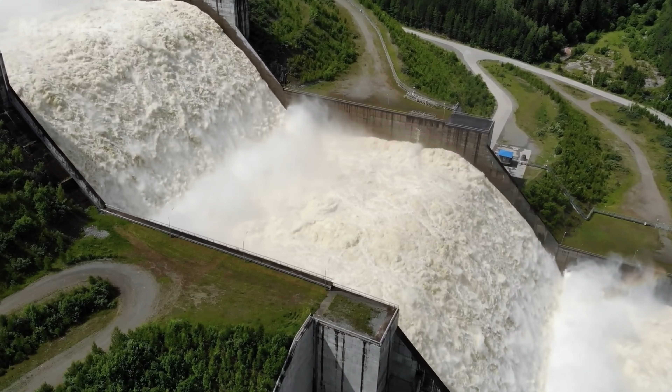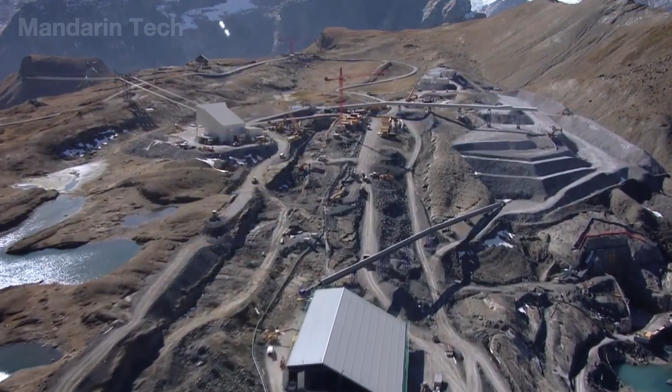Standing across the Yenisei River, Sayano-Shushenskaya is a mega dam that has become an energy symbol of Siberia. When completed, the plant reached a capacity of up to 6,400 megawatts, making it the largest hydroelectric power plant in Russia. To build this project, the Soviet Union had to spend decades constructing it amid snow, ice, rocky mountains, and a massive river that was never easy to conquer.

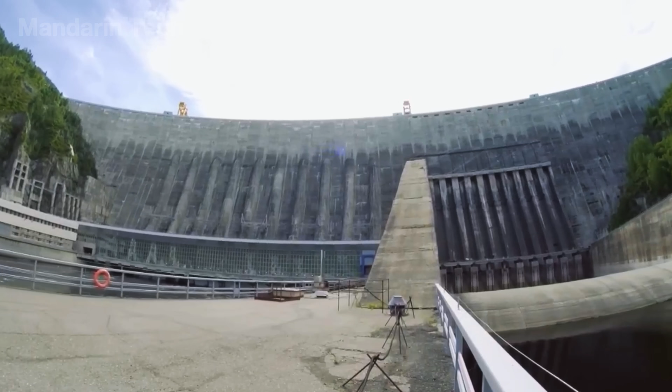But what made Sayano-Shushenskaya famous was not only its scale. Behind its 242-meter-high concrete wall is the story of one of the Soviet Union's most ambitious engineering projects, along with one of the most serious hydroelectric accidents of the 21st century, which forced the entire global hydropower industry to rethink its safety standards.

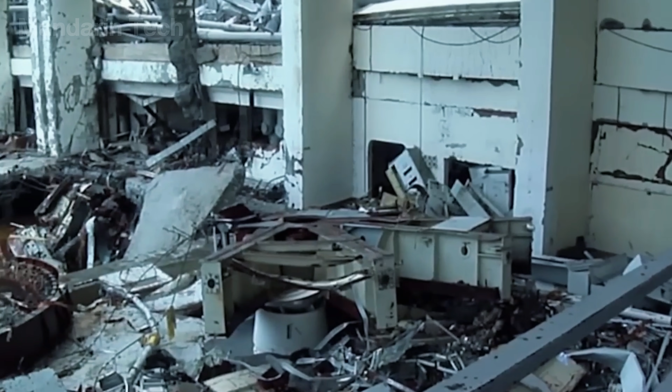Join Mandarin Tech as we explore the story behind this mega dam in the heart of Siberia.

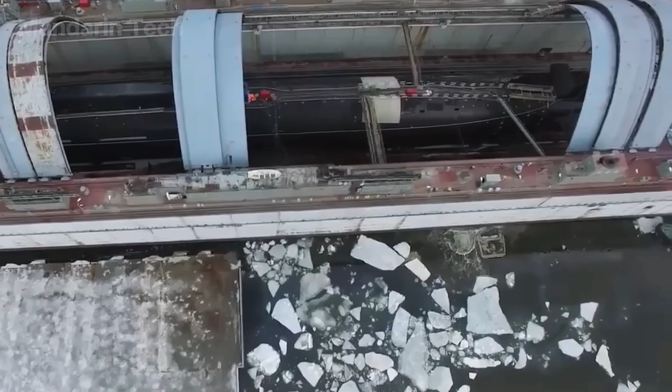At the height of the Cold War, the Soviet Union did not compete with the West only through missiles or nuclear submarines. That competition also took place inside metallurgical plants, mineral mines, and massive industrial complexes stretching across Siberia, where electricity consumption was so enormous that only mega hydropower projects could meet the demand.

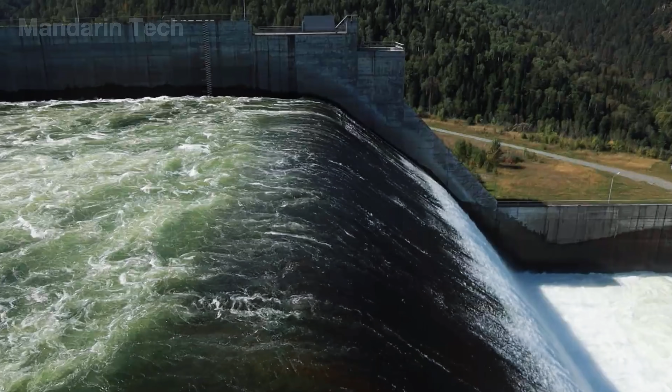For Soviet planners, the Yenisei River was seen as an almost endless source of energy, flowing wastefully into the Arctic Ocean every day. If they could harness the power of this river, the Soviet Union would have access to cheap electricity, strong enough to operate strategic industrial zones for decades. It was from that ambition Sayano-Shushenskaya was born.

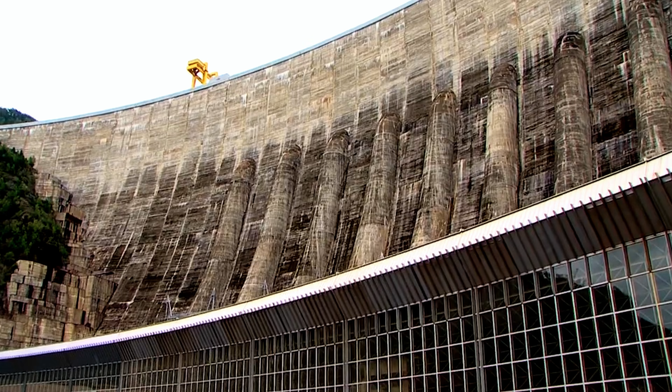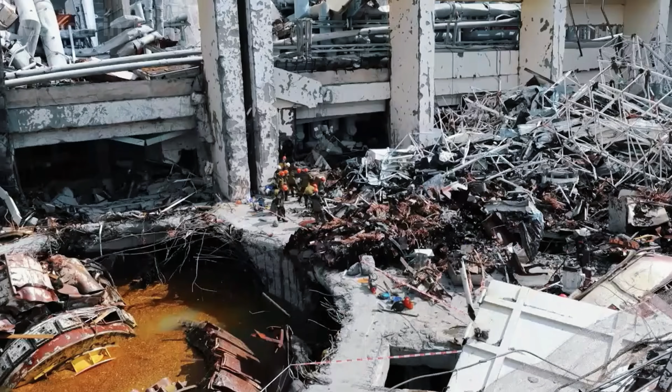For many years, this power plant served as the energy heart of Siberia, providing a massive supply of electricity for the entire region. However, after decades of operation, a horrifying incident occurred. In 2009, Unit 2 was suddenly destroyed after the bolts holding the turbine cover in place broke, taking the lives of 75 people and becoming one of the worst hydroelectric accidents of the 21st century. Yet even in the middle of that disaster, the dam body remained standing, preventing a scenario that could have been far worse.

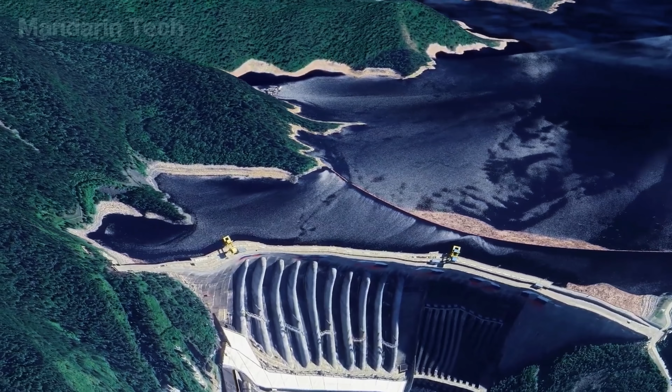The story began in 1963, when the Sayano-Shushenskaya project officially started construction. But before the dam could be built, Soviet engineers had to do something that seemed almost impossible: divert the Yenisei River away from the construction site. This was not an easy task.

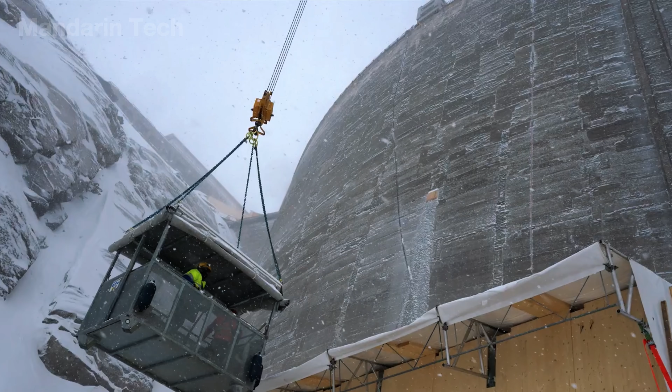The Yenisei is one of the largest rivers in the world, with an enormous volume of water flowing through the canyon every day. Meanwhile, the construction site was located in Siberia, where winter temperatures often drop below -30 degrees Celsius. The ground and rock remained frozen for many months. The annual construction window was significantly shortened, and operating heavy machinery became far more complicated than on ordinary construction sites.

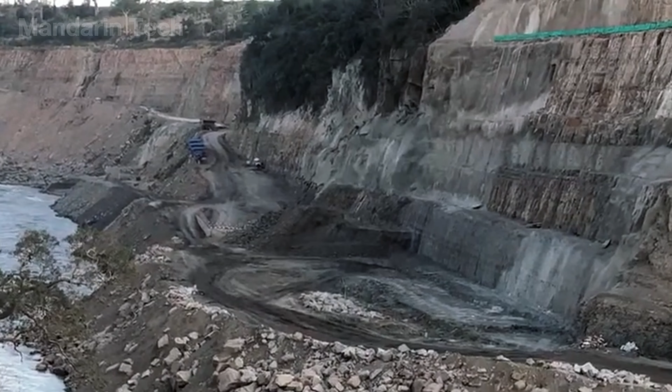To solve this problem, the engineers chose a river diversion method using a system of tunnels through the mountains. First, construction teams drilled and blasted the rock on both sides of the canyon to create diversion tunnels capable of carrying the full flow of the river throughout the dam's construction period.

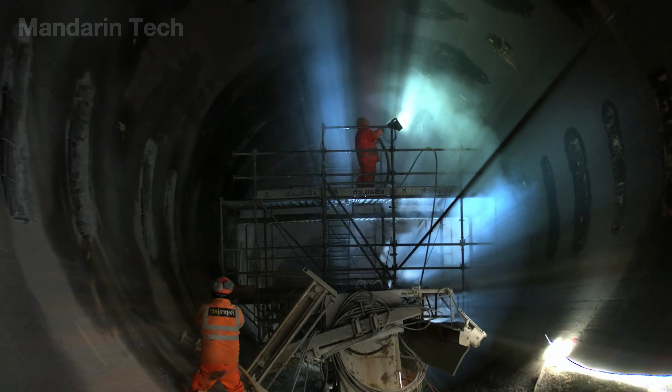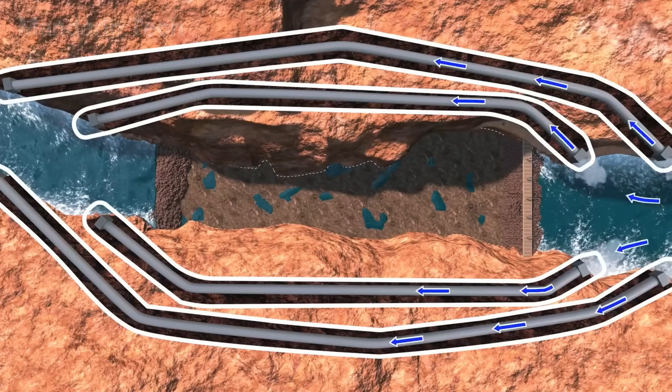After the tunnels were completed, the project moved into the stage of building upstream and downstream cofferdams. Millions of cubic meters of earth and rock were transported to the site and continuously dumped into the riverbed to gradually narrow the main flow. When the cofferdams reached their designed elevation, the river water began to be fully directed into the diversion tunnel system.

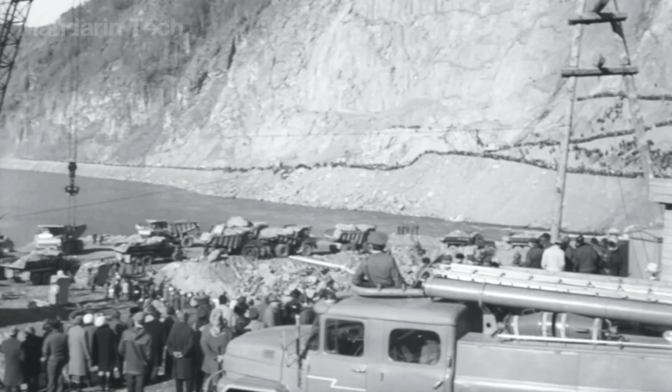The section of the riverbed inside the cofferdam area was then pumped dry, and the layers of silt, sediment, and accumulated alluvial material that had built up over thousands of years were removed. This was also the moment when the Yenisei River had been completely diverted.

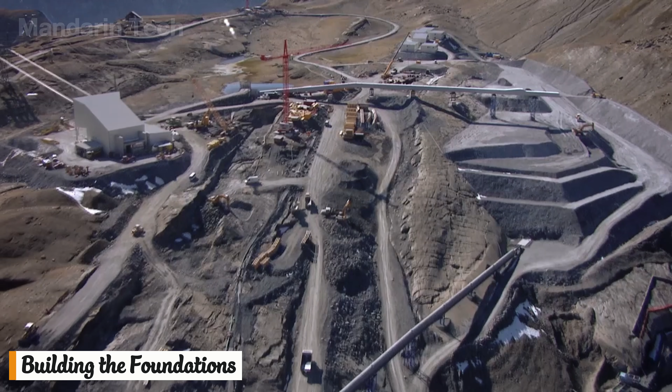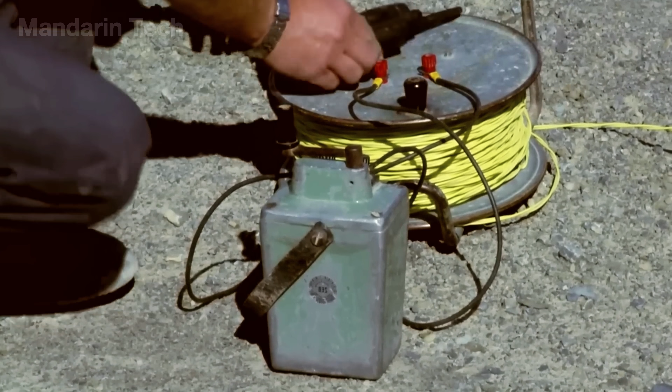After the river had been successfully diverted, the construction site had to carry out a large-scale foundation treatment campaign. Construction teams used drilling and blasting to remove the weathered rock layer and unstable soil and rock above the bedrock. More than 10 million cubic meters of material were excavated, exposing the stronger rock masses underneath.

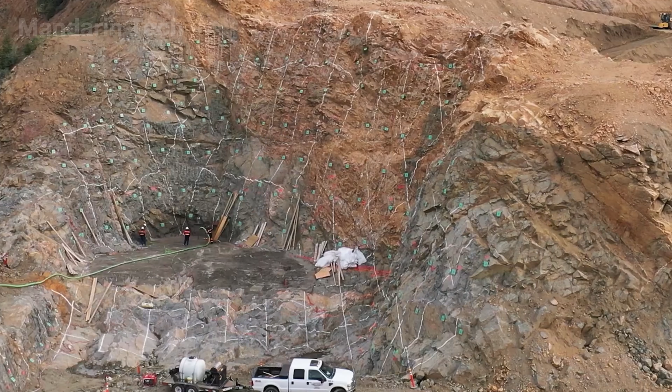After the foundation excavation was completed, the engineers began a detailed survey of the bedrock surface. Natural cracks were identified, cleaned, and treated using high-pressure grouting. Thousands of boreholes were drilled to pump cement grout deep into the rock foundation, helping reduce water seepage and increase the stability of the entire dam foundation area.

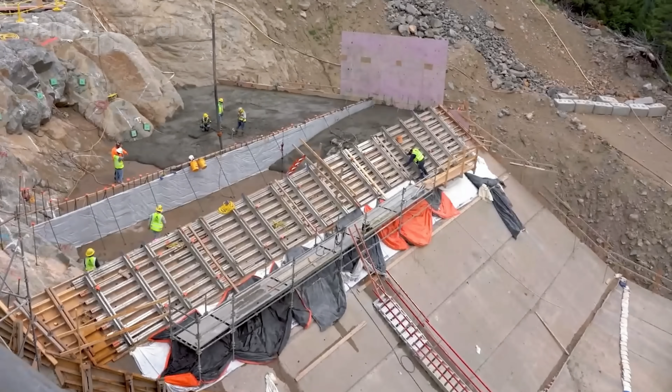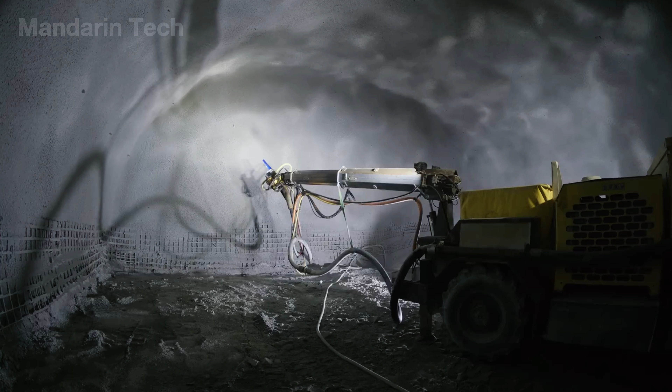At the same time as the foundation reinforcement process, inspection galleries and technical tunnels inside the bedrock were also constructed. These structures allowed engineers to access the foundation area during later operation, while also monitoring water seepage, deformation, and stress developing beneath the structure.

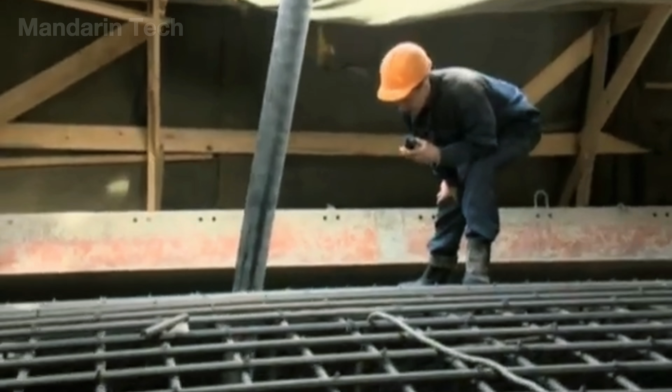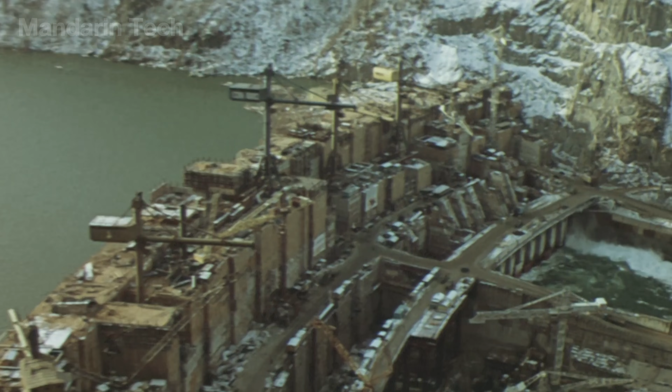Only after all foundation treatment work had been completed did the construction of the dam body truly begin. Sayano-Shushenskaya was designed as an arch-gravity dam, a massive structure that combines the weight of the dam body itself with the curved shape of the structure to transfer water pressure to the rocky mountain slopes on both sides.

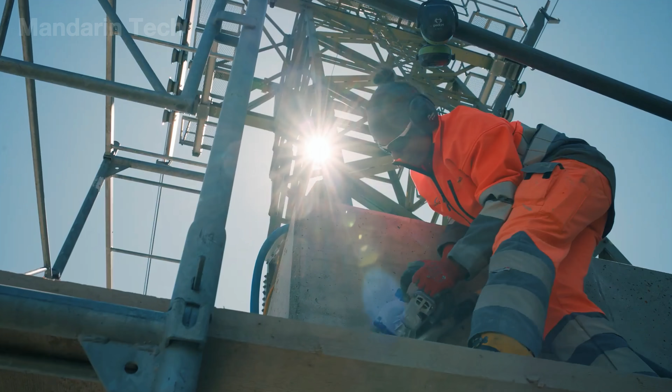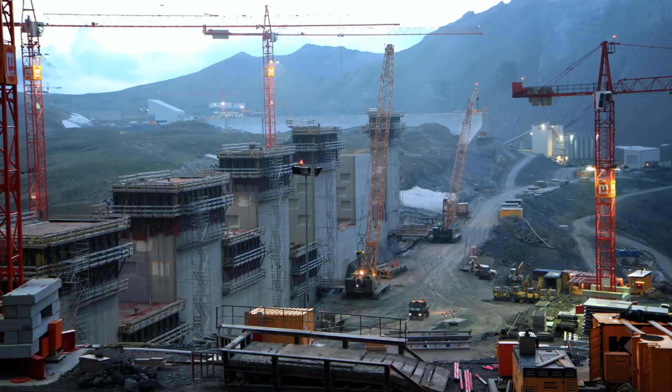To build this project, Soviet engineers did not construct the entire dam all at once. Instead, they divided the dam body into many separate blocks, then poured concrete layer by layer and stage by stage. However, the biggest challenge did not come only from the enormous volume of concrete, but also from the harsh climate conditions of Siberia. The summer was short, but temperatures could change sharply between day and night, while the winter lasted a long time with extreme cold.

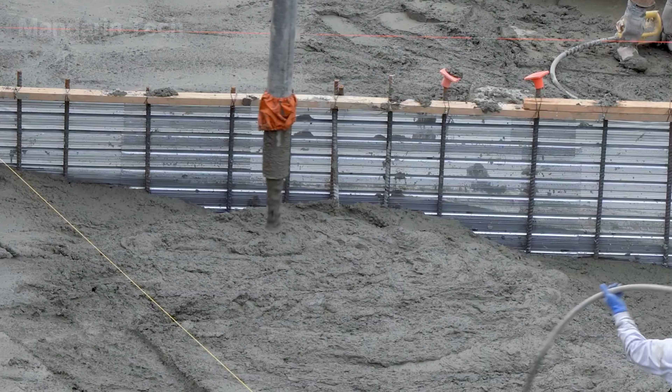At the same time, the hydration process of cement continuously generated heat inside the concrete mass. If the temperature was not tightly controlled, the difference between the core and the surface could create dangerous cracks. To solve this problem, the concrete temperature was continuously monitored by a system of sensors, while the concrete pouring schedule was carefully calculated to limit thermal stress.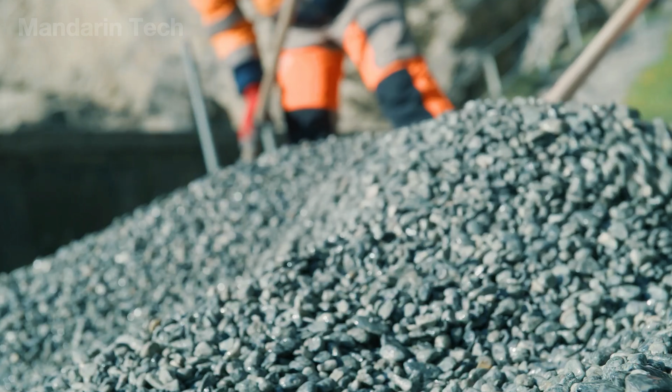At the same time, a large-scale material transportation network operated almost non-stop to supply concrete to the construction site. Layer by layer, the concrete gradually stacked up. 50 meters, 100 meters, 150 meters, and then even higher. In the middle of the western Sayan Canyon, a giant wall began to take shape.

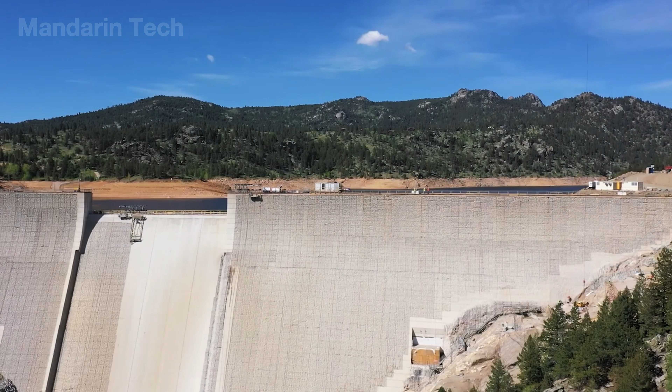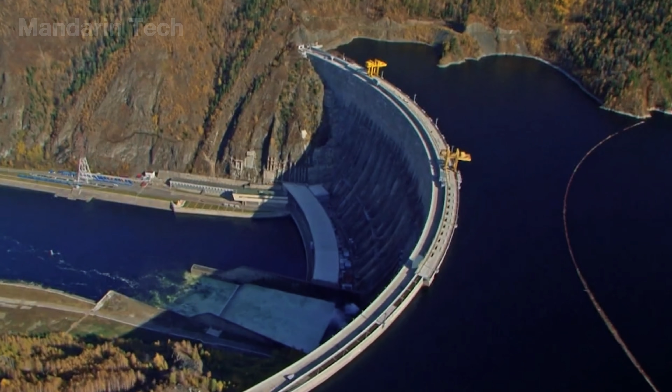The higher Sayano-Shushenskaya rose, the more it had to face another life-or-death challenge. Behind this dam is a reservoir with a capacity of more than 31 billion cubic meters of water. Under normal conditions, it is a massive source of energy that powers Siberia's industrial zones. But during flood season, that same body of water, weighing tens of billions of tons, can become a threat to the structure. If the flood discharge capacity is not sufficient, the water level behind the dam will continue to rise and create pressure beyond the design limits.

That is why Soviet engineers had to build one of the most important spillway systems of the entire project. The work began with large-scale drilling and blasting operations to create a construction platform in the middle of rugged, rocky mountain terrain. After that, concrete was poured continuously to form water channels, guide walls, and energy dissipation basins, structures whose purpose was to control and reduce the force of the water before it returned downstream.

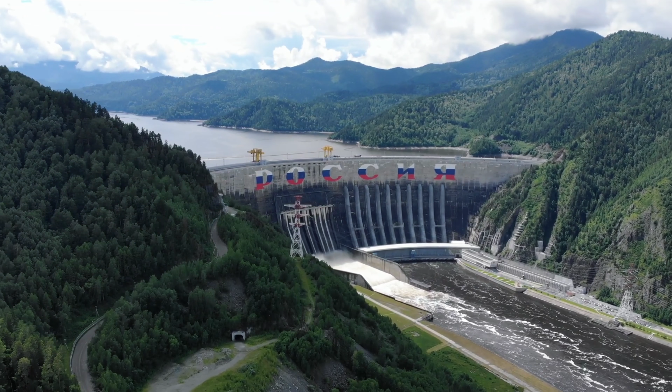When the structural work was completed, large steel gates and mechanical control systems were installed to regulate the discharge flow under different operating conditions. At the same time, engineers continuously used hydraulic models and flow calculations to test the flood discharge capacity of the entire system.

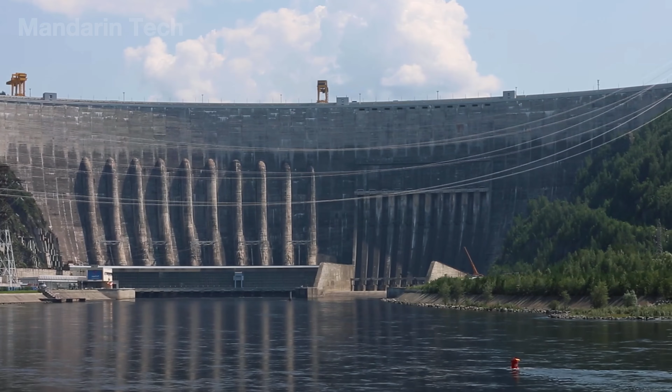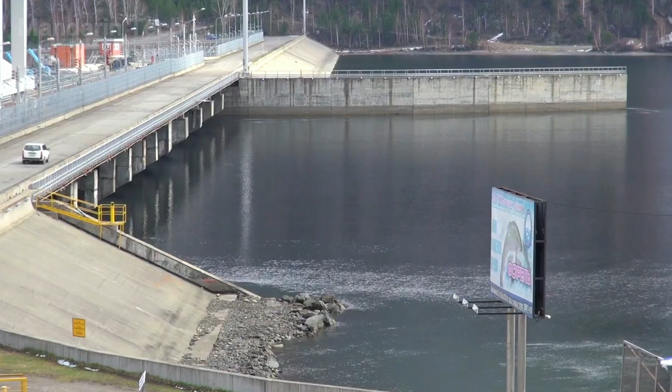However, no matter how massive a dam is, it is only a place to store energy. To turn the enormous body of water behind the dam into electricity for Siberia's industrial zones, Soviet engineers also had to build the true heart of the entire project, the Sayano-Shushenskaya hydroelectric power plant. Right below the foot of the dam, a massive volume of rock was excavated to create space for the turbine hall, the generator hall, and a series of auxiliary technical structures.

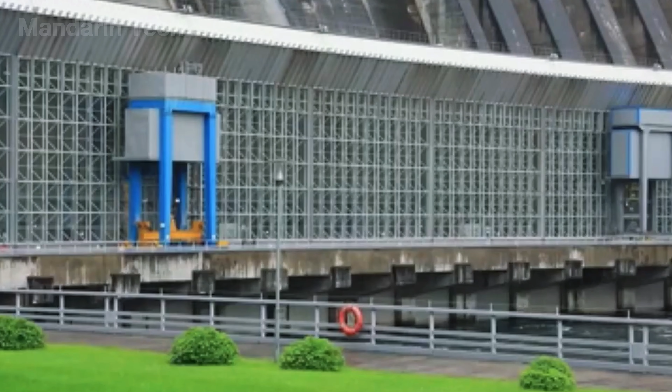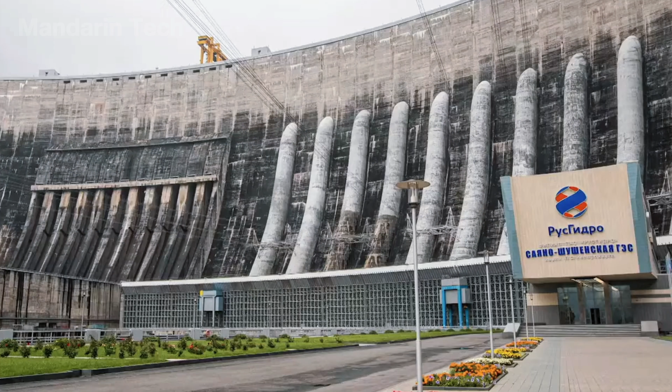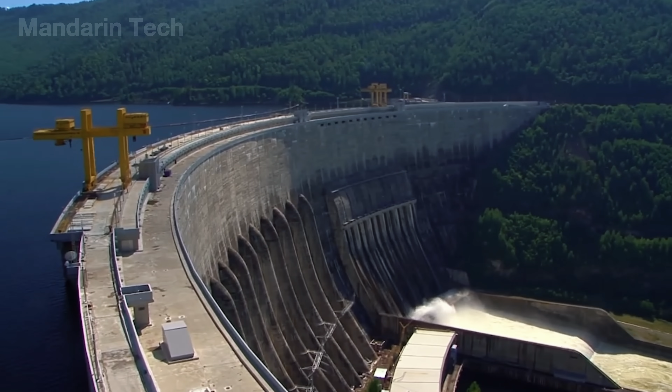After the foundation was reinforced, concrete was poured continuously to form the framework of the power plant. This was not just an ordinary civil structure, but a facility that would have to withstand the force of a water column hundreds of meters high, along with the weight of the enormous electromechanical equipment inside. At the same time as the power plant was being built, large pressure pipes and the water intake system were also constructed. These structures acted like arteries, carrying water from the reservoir down to the turbines.

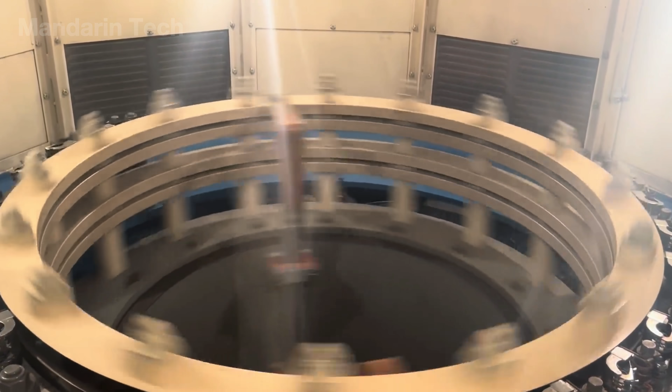During operation, the potential energy of the massive body of water behind the dam would be converted into kinetic energy as it rushed through the pressure pipes, spinning the giant turbines directly connected to the generators. After transferring most of its energy to the generating units, the water continued to be discharged back into the Yenisei River through the downstream outlet channel system.

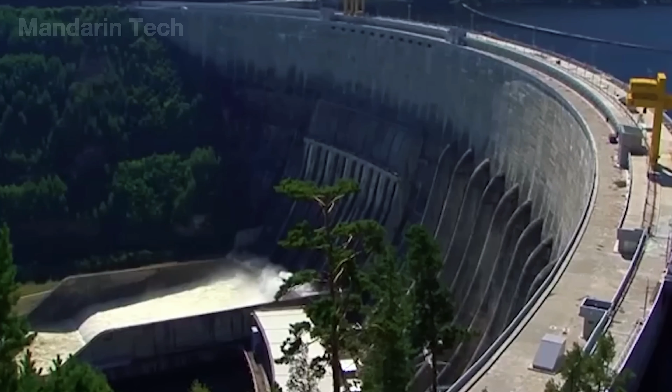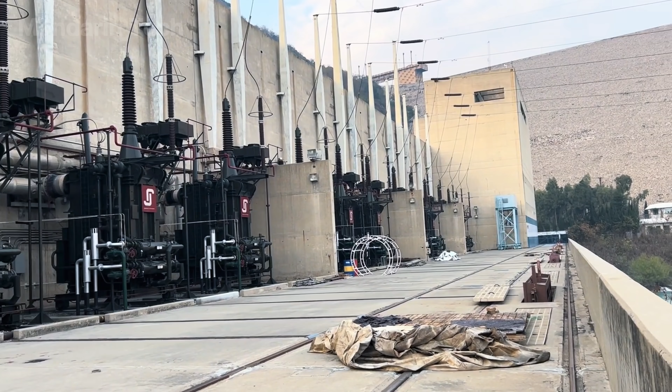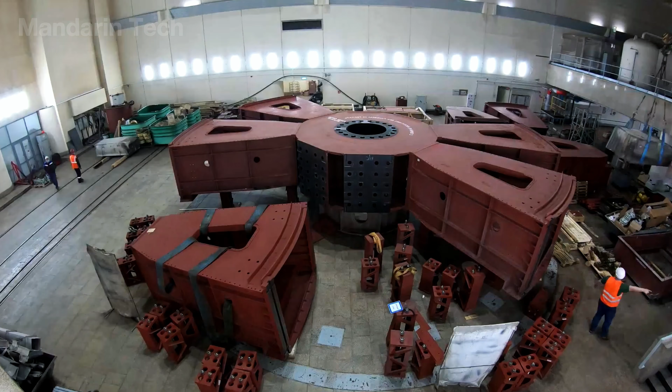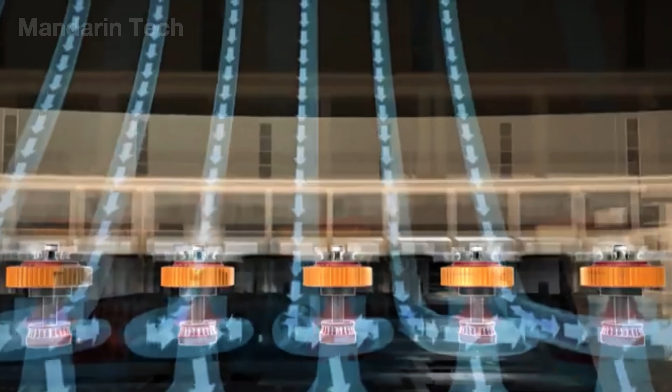However, even after the dam body and the hydroelectric power plant had been completed, Sayano-Shushenskaya still could not generate electricity. To harness the power of the Yenisei River, Soviet engineers still had to install the largest hydroelectric generating units ever built in the country. These machines could not be transported as a single piece. The turbines, shafts, rotors, and stators had to be manufactured at factories and then transported to the construction site as many separate components. Inside the machine hall, heavy-duty overhead cranes continuously lifted and lowered parts weighing tens to hundreds of tons into their exact designed positions.

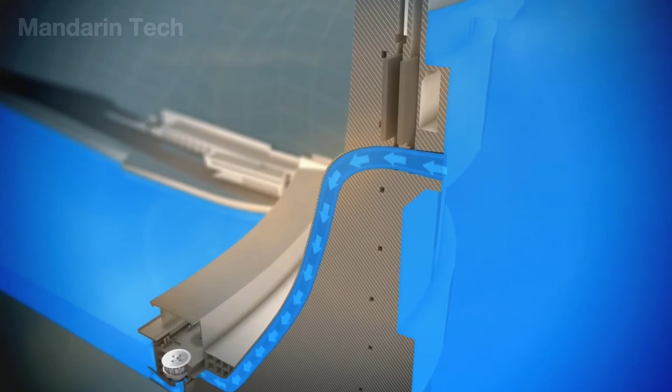The rotor of each generator alone weighed about 920 tons, while the entire generating unit was a massive electromechanical system designed to operate continuously for decades. The greatest difficulty was not in bringing these machines into the power plant, but in the precision required during assembly. During operation, the turbine would rotate at about 143 revolutions per minute under the force of a water column hundreds of meters high. With equipment of such enormous size and weight, even a small error in alignment could create major vibrations, reduce efficiency, or cause serious damage to the entire generating unit.

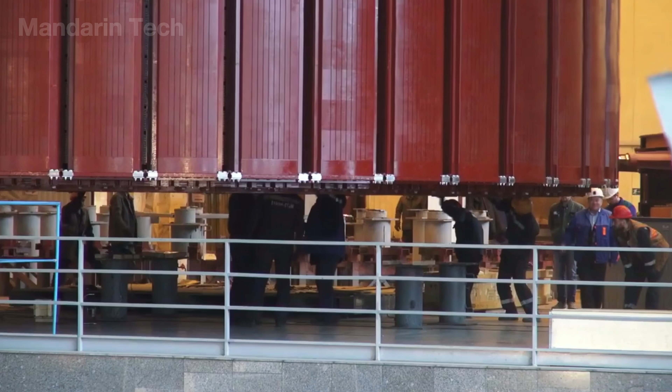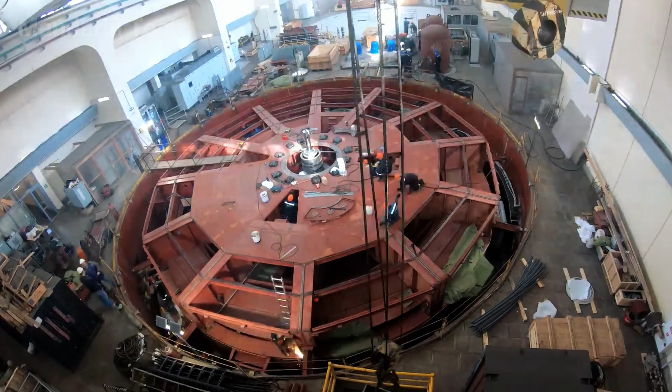Therefore, each piece of equipment had to go through months of alignment, concentricity checks, vibration checks, and mechanical testing before it was allowed to operate. After the entire installation and test running process was completed, the generating units were gradually connected to the national power grid. In the end, Sayano-Shushenskaya was equipped with 10 generating units with a total capacity of up to 6,400 megawatts, becoming one of the most powerful energy projects ever built in the world.

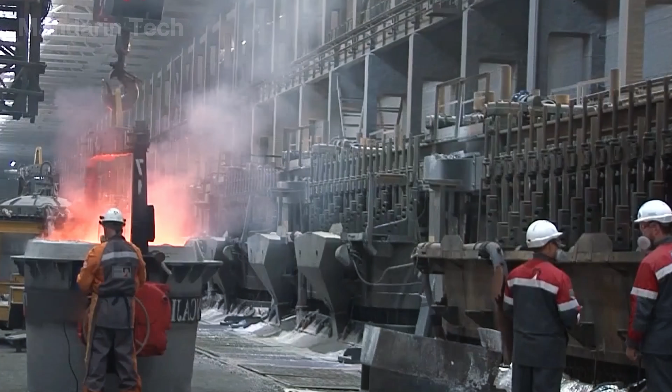For decades, water from the reservoir continuously flowed through the giant turbines, providing electricity for metallurgical, mining, and heavy industrial complexes across Siberia. However, on August 17, 2009, a disaster occurred right inside the turbine hall of the power plant. After many years of abnormal vibration, the anchor bolts holding the turbine cover of Unit 2 broke.

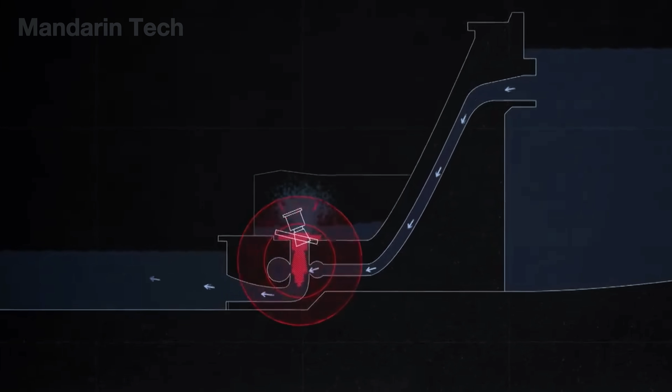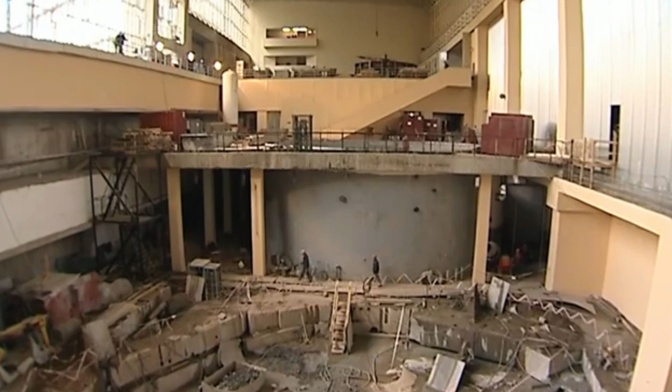In just a few seconds, the enormous water pressure blew the entire upper structure apart, threw the generator rotor weighing about 920 tons out of place, and caused water to violently flood into the machine hall. The disaster took the lives of 75 people, becoming one of the most serious accidents in the history of modern hydropower. However, what is worth noting is that the cause did not lie in the dam itself. While the power plant was heavily devastated, the Sayano-Shushenskaya dam body remained standing and continued to safely hold back the enormous reservoir behind it.

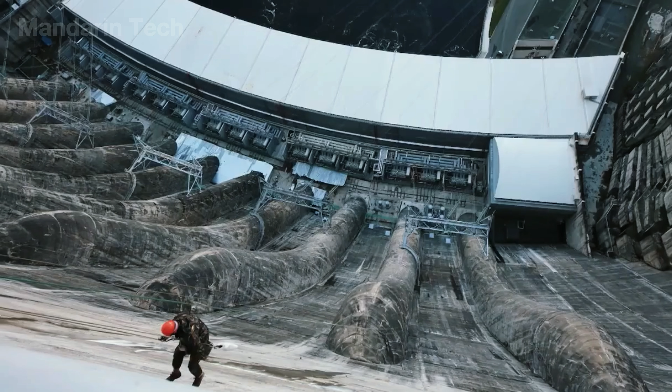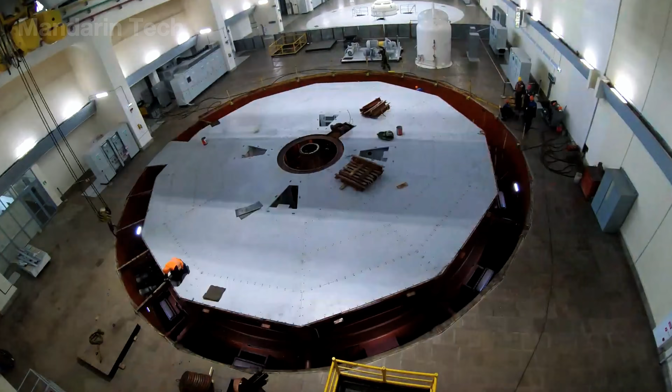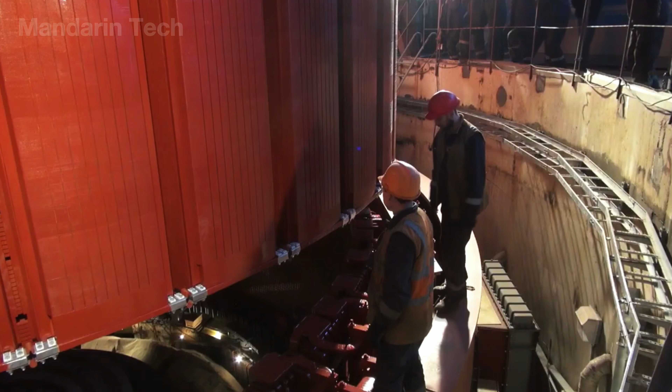After the accident, Russia launched one of the largest hydroelectric power plant restoration programs in the country's history. Thousands of tons of damaged equipment were removed from the machine hall. The old generating units were gradually replaced with a completely new generation of turbines and generators. At the same time, the control, monitoring, and operational protection systems were redesigned with safety standards far stricter than before.

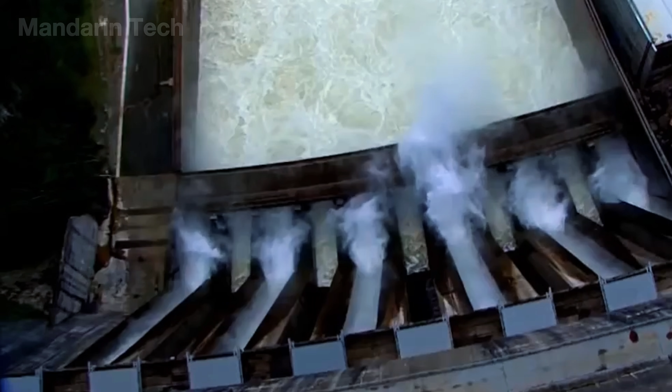A series of sensors monitoring vibration, temperature, pressure, and the operating condition of the generating units were installed to detect early signs of abnormality. The restoration process was carried out in stages, both to maintain electricity supply for the Siberian power grid and to gradually bring the plant back to full operation. By 2014, the final generating unit was officially connected to the grid, closing the journey of revival for this hydroelectric project.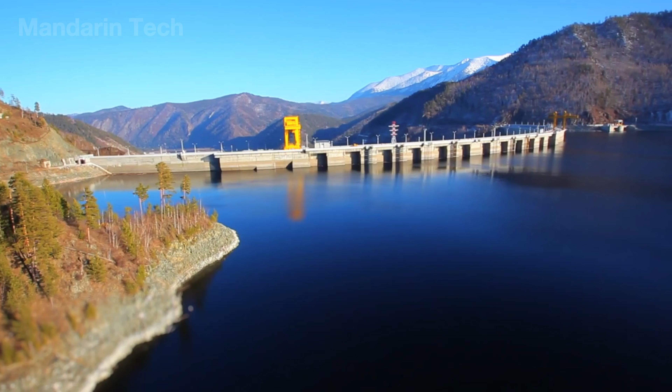Behind the 242-meter-high concrete wall is another massive structure that many people often overlook, the Sayano-Shushenskaya Reservoir. When the filling process was completed, water from the Yenisei River gradually rose between the western Sayan Mountains, forming a reservoir more than 300 kilometers long with a capacity of about 31 billion cubic meters of water. The reservoir was so large that it completely changed the terrain of the entire area.

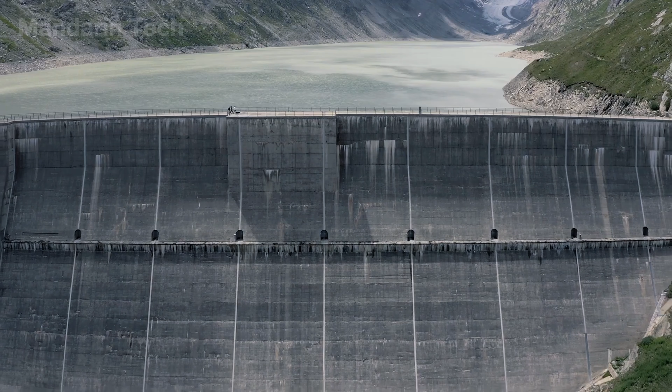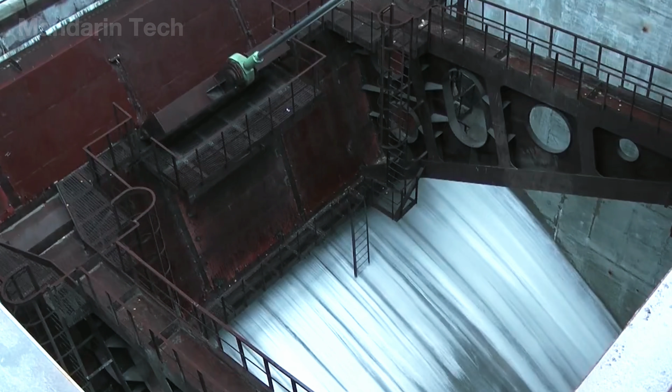Many former river valleys, floodplains, and low-lying areas disappeared beneath the water, making way for one of the largest artificial lakes in Russia. From the air, the reservoir stretches out like a vast inland sea winding between the mountains of Siberia. For the Sayano-Shushenskaya system, this reservoir acts as a huge storehouse of energy. Thanks to the water stored behind the dam, the power plant can maintain stable electricity production even when the flow of the Yenisei River changes sharply with the seasons.

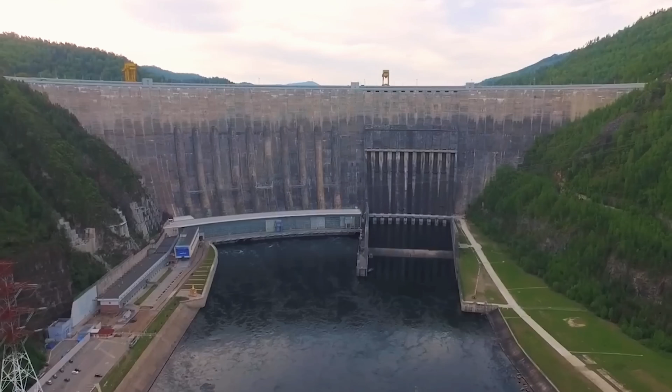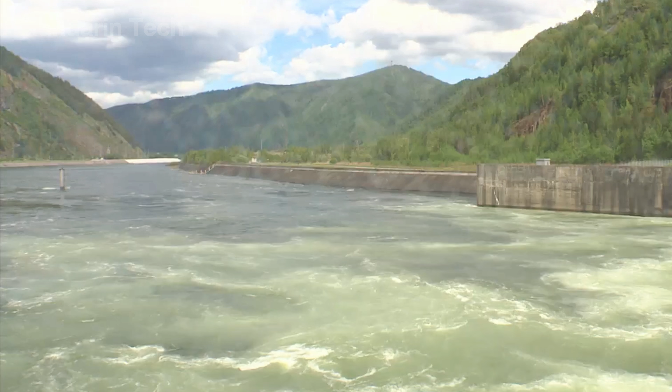The role of the reservoir also goes far beyond electricity generation. In spring, when melting snow in the upstream mountains causes the water flow to rise sharply, the reservoir helps retain part of the floodwater before releasing it downstream in a controlled way. In contrast, during periods when the river flow decreases, this stored water continues to be used to maintain power generation and stabilize the flow of the Yenisei River.

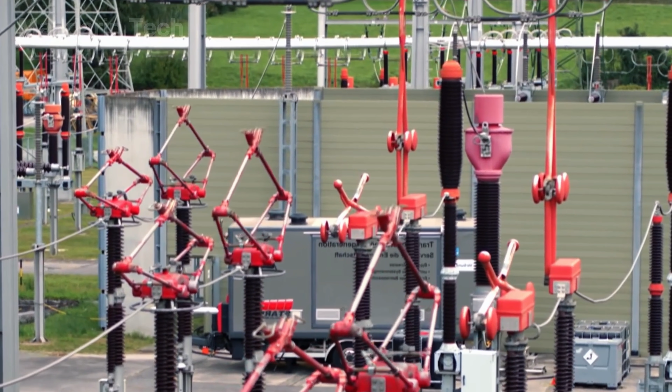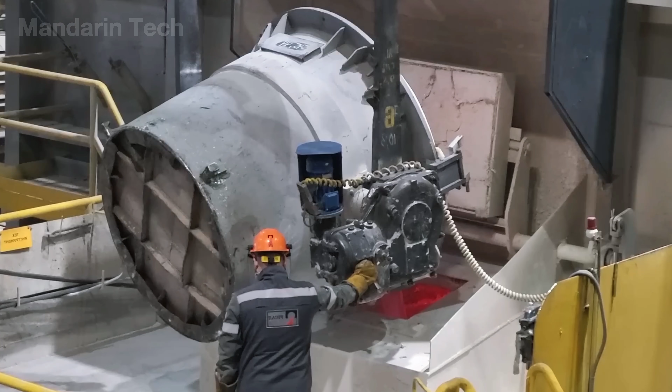Today, Sayano-Shushenskaya does not simply provide electricity for Siberia. This project is one of the foundations that helps Russia maintain its position in the global aluminum industry. Aluminum is a strategic material widely used in aviation, defense, transportation, and many other modern industries. Producing 1 ton of aluminum requires about 13,000 to 15,000 kilowatt-hours of electricity.

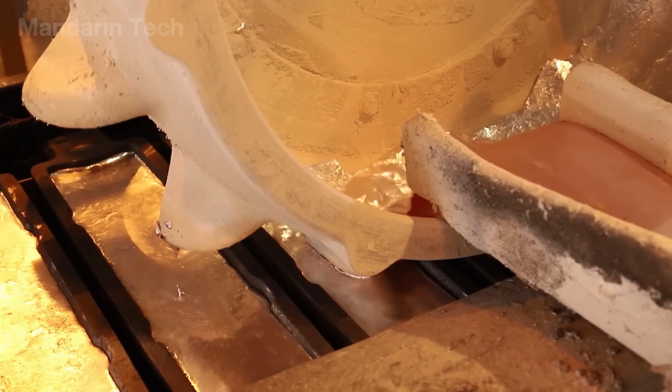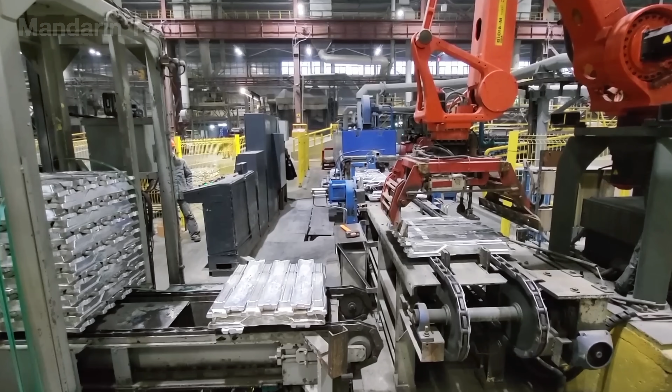Electricity costs often make up a large part of production costs, so access to stable and low-cost hydropower becomes an extremely important competitive advantage. It is the electricity from the hydropower system on the Yenisei River, with Sayano-Shushenskaya at its core, that has helped sustain the operation of Siberia's largest aluminum smelting complexes for decades.

As Russia seeks to maintain energy security and reduce dependence on fossil fuels in some regions, Sayano-Shushenskaya continues to play the role of a strategic national asset. More than 50 years after it was built, this project is no longer simply a dam or a power plant. It has become an important link in the modern Russian economy.

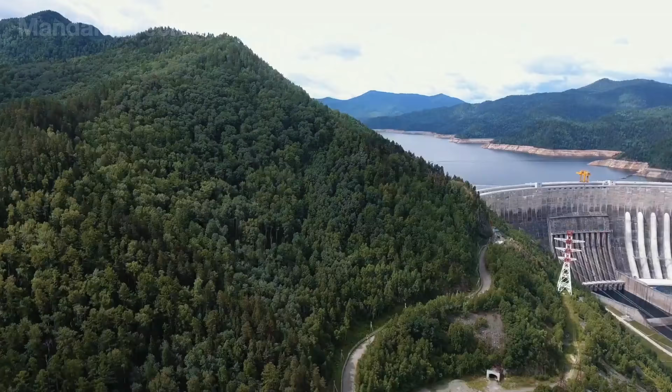Sayano-Shushenskaya shows something interesting about megaprojects. The hardest part is not building them, but keeping them operating across many generations. From an industrial ambition of the Soviet era, this project has survived a harsh climate, enormous engineering challenges, and even a serious disaster to continue existing today. Perhaps that is the true measure of a great structure, not how massive it is when completed, but how much value it can still create many decades later.